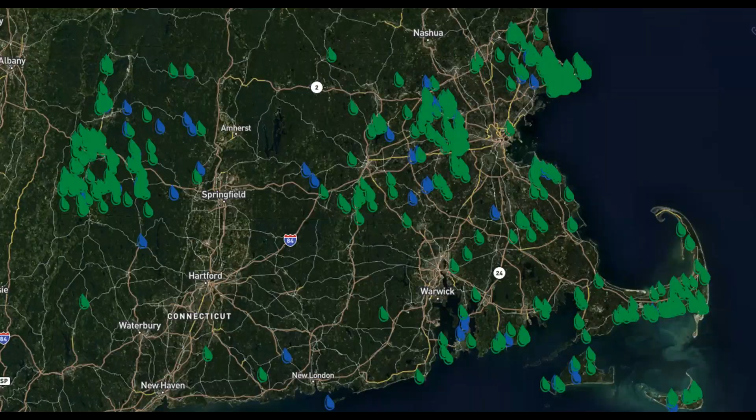Some of the droplets are so close together that there could be 10 or 11 systems in a small geographical area, which we've seen before. If you click on one of these droplets, it'll bring you to a new screen, and it'll actually give you a satellite image of that site. And then on the left-hand side, it'll provide you background information on that particular project, when it was built, the effluent strength, how many gallons per day, the actual location, and some site pictures and perhaps some videos.

This is a great tool if you're a designer and you just kind of want to get a sense of what type of use Perc-Rite has been in your area, or maybe you have a client who wants to get a better feel for that. This is not a brand new system and it's widely used throughout the state. This is a really good resource for you to share with your colleagues, your clients, or whatnot.

So the history of Perc-Rite goes back really to the 1970s, where effluent disposal was used through irrigation tubing, and it was generally in the Middle East. So they would pipe from the cities the treated effluent out to the deserts and grow crops. In the 1980s, the folks from American manufacturing learned about this and brought the concept back to the States and worked on how that system could work for us, and mostly on-site versions of that concept.

They got their patent in the 1990s, and their first system was installed very early in that decade. And the interesting anecdote is that our first original system is still active, and they actually went back, probably about 10 years ago, and they did a little bit of an archaeological dig and took a look at it, and the parent material, the tubing, everything was fantastic. So you're looking at something that's been in the ground for 30 years and still working exceptionally well.

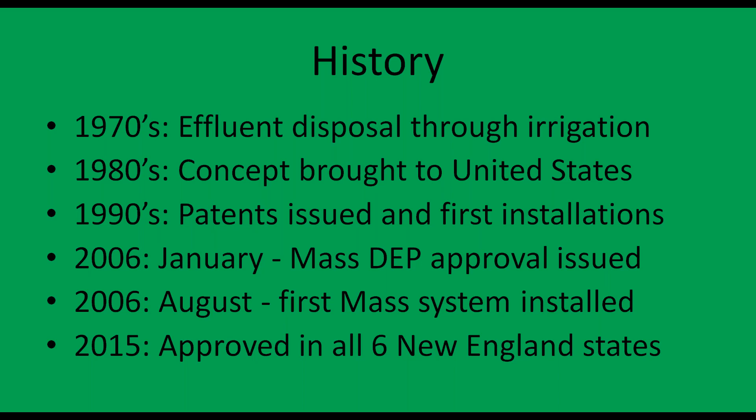So here is a little bit of the background of how Perc-Rite came to New England. It's really all about Dan. Dan worked as an engineer at Mass DEP for a while, and then went to the city of Gloucester, and they were having a lot of on-site issues for pollutants along the coastline, and he pioneered a lot of different technologies coming into the region. He learned of Perc-Rite and basically went to the private sector and brought Perc-Rite to Massachusetts and then throughout New England.

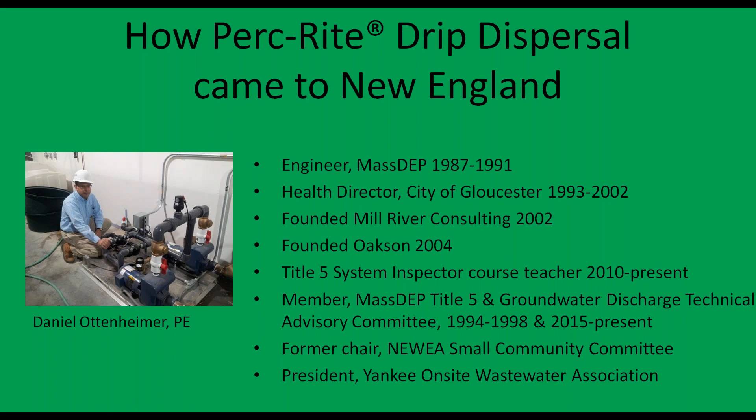So let's go right into the nuts and bolts here. So Perc-Rite is equivalent to pressure distribution under Title 5. So that's a very important thing just to get over with right away. We are considered pressure distribution. We are also approved to discharge both primary or treated effluent for new construction or upgrades and repairs. So we have a general use approval, we have a remedial use approval, and both approvals allow primary or secondary treated effluent disposal.

So here's a little flow chart of how the system works. We will have effluent generated into either a septic or treatment tank. It'll carry over to a pump chamber, pump through a device called the hydraulic unit. From the hydraulic unit, there'll be a force main that'll take the effluent to a manifold, which feeds the drip dispersal tubing. The drip dispersal tubing does not have to be in a perfect rectangular shape or perfectly spaced. You can see here in the rendering, it goes around a tree. It cuts short of another tree.

It goes through all the tubing, and it basically goes into a return manifold, back to a return force main into the hydraulic unit again, and then it has the ability to discharge back into the septic or treatment tank. That gravity discharge line back to the primary tank will allow us to not only clean the tubing when it's needed, but also clean the filters that clean the effluent before it goes out to the drip field. And we'll go over that in a little more detail throughout the presentation.

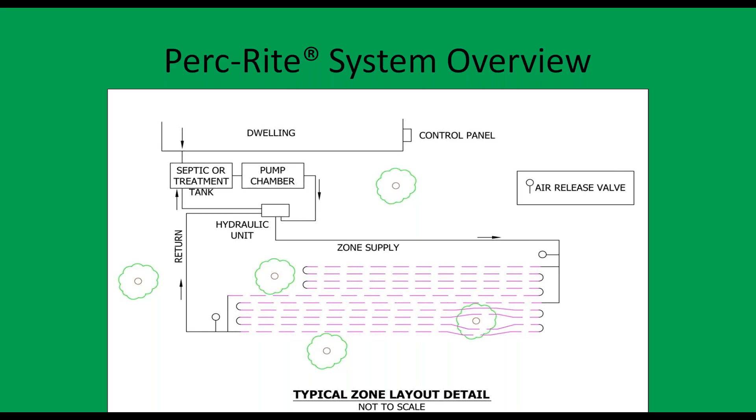So what we call a single piece of drip dispersal tubing is a run. A collection of runs make a lateral. So this would be fed through a manifold. So one lateral is a series of runs put together. Many series of runs or laterals tied together we'll call a single drip dispersal zone. Typically, residential applications will only have one zone.

We'll have our septic tank or treatment tank, carry through to a pump chamber, pump through the hydraulic unit. We'll have the supply and return force mains and manifolds and that gravity return line that goes back to the primary tank. There's a control panel that controls the whole operation. There's an air release valve that allows instant pressurization and also the ability to purge the lines after the pumping. And that is a Perc-Rite drip dispersal system.

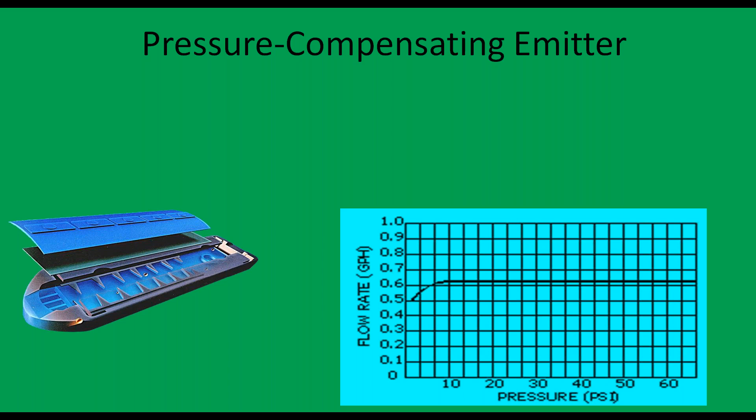And what's critical for this is that the system does not need to be installed on a flat bed. This can be on a sloping site. It could also have irregular shapes. So perhaps you have a situation where you have tubing that is closer to the pump, lower elevation than far away from the pump. You're going to get the same exact application rate.

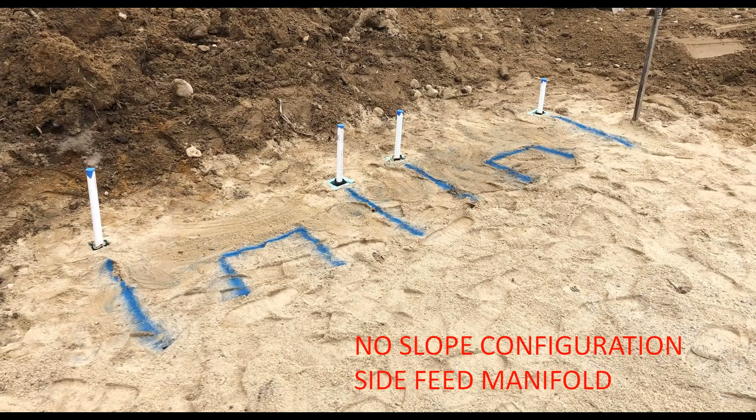So in order to achieve that pressure inside the tubing, there is a manifold configuration. So when there is no slope to a particular drip dispersal zone, it'll be what we call a side feed manifold. And that's very similar to your pressure distribution type configuration, where you have force main below the frost zone, and then it goes up to the pipe. So you can see here the different laterals that are ready to be connected to the drip dispersal tubing. So again, it's a side feed manifold, no slope.

Let's talk about the approvals. So Mass DEP issued our first approval in 2006. We have both a general and remedial use approval. And we are fully approved under Title 5 for new construction or upgrades, septic tank effluent or treated effluent, secondary or better. So pretty much any type of system that you need to build under Title 5, Perc-Rite can be an option for you.

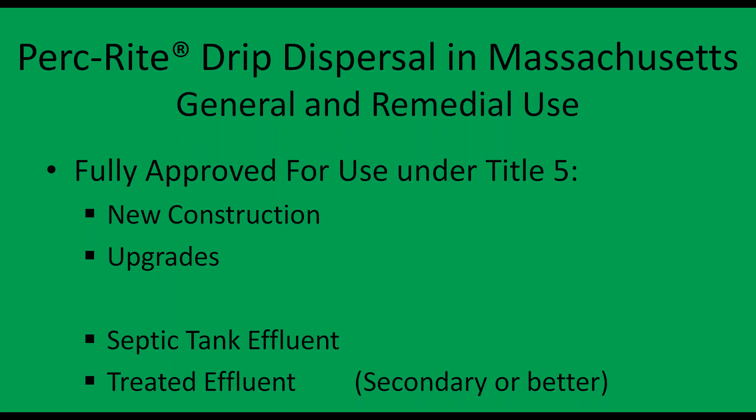Some of the key aspects of our approval through general use and/or remedial use: we are considered pre-engineered under 2,000 gallons per day. We are equivalent to pressure distribution. There is no 5-foot overdig required, and this is not a variance or anything. This is written right into our approval, so you don't need to ask for any relief. It's granted. There is no need for an inspection port.

There are no vents required. We can be as close as 5 feet to a cellar wall. The tubing can be installed in the parent material A, B, or C soils. The tubing can be as shallow as 6 inches below finished grade. So that comes into a huge play when we're dealing with mounded systems. Perc-Rite will end up being the shallowest type of option that you can choose. And there are some flexible reserve area requirements that are given to us under the approval.

There are some instances where we have to issue some letters for any system greater than 2,000 gallons per day. Oakson will provide you a letter of review that you will turn in with your submittal. Perc-Rite can be installed in Class 4 soils. If you choose to design in a Class 4 soil, you will need an accompanying letter by Oakson again. And for any type of non-residential systems, commercial, restaurant use or whatnot, we will also issue a letter of review of your plans.

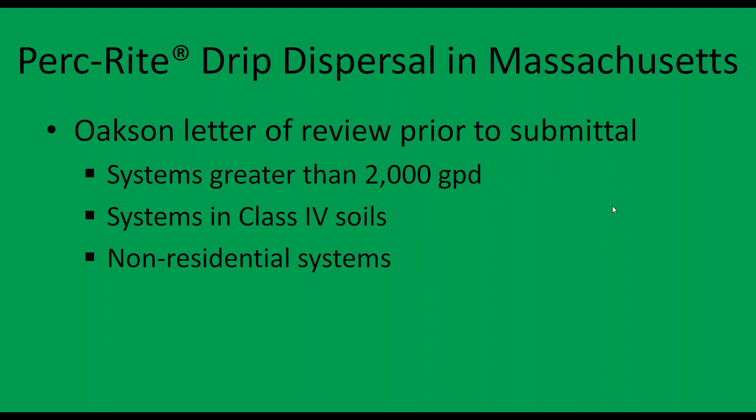So sizing, really simple. We are the same size as any Title V leach field. So if you're just doing a traditional Class 1 type of soil, you can use the same loading rate under Title 5. Because we are equivalent to pressure distribution, we can use the pressure distribution loading rate chart. And the same goes for any type of local upgrade approvals. You certainly can choose to do that with our technology. And if you're using a treatment system, you can gain the relief that the treatment system approval gives you and use it with Perc-Rite.

We have a good question here. The question is, why is it acceptable to install this system in the A soil horizon? Dan, we haven't heard from you in a while. Would you like to chime in on that one? I would. Can you hear me? Yes. Oh, great.

So we want to get as much natural treatment as we possibly can, and the A soil horizon contains the most organic material and the most microbial activity, and allows for the best treatment of the effluent when it's applied into the soil. So that's a primary factor. Also, just a simple matter of construction. If you're building it in the woods or in someone's yard, we're trying to minimize site disturbance. So putting it right into the A soil horizon is a great way to reduce the impact on the land during construction.

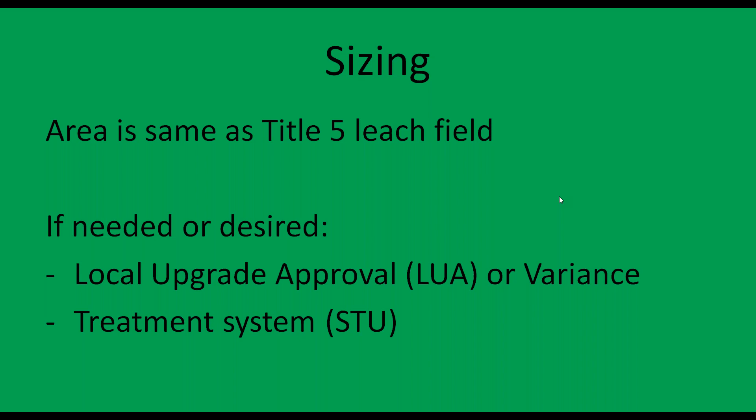So we are included in the guidance manual for groundwater discharge projects. So if you are a designer working in that area, there is great information there, and Perc-Rite is a very viable option. The rendering that we show a lot on the right is actually a real project. So I wanted to take a satellite image and share it with you so you can see how the grass is quite thicker over the dispersal area, because this picture was taken in late November. So most of the other grass on the site is dormant, but the warm effluent with the uptake into the grass roots is keeping it quite more alive throughout the season.

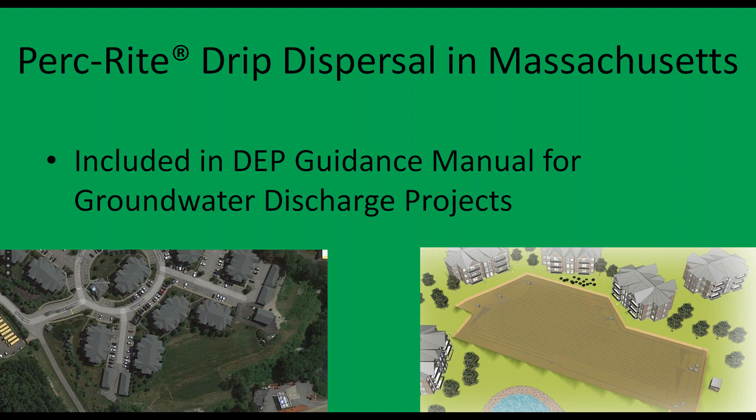So our approach, Oakson provides full support from the design concept, installation, all the way through operation. So let's talk about some of those specifics. Let's go through a residential design. So if you are a designer, you could go and grab the design manual that we have on our website. It's also included here as a handout in your dashboard if you'd like to download it.

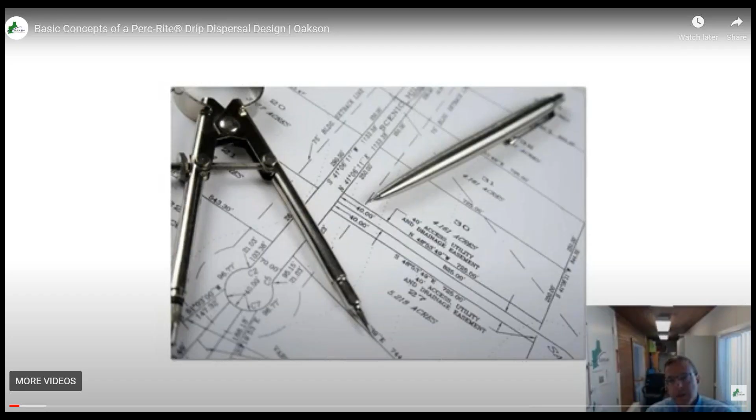Or in today's world, we've seen a lot more use of video and YouTube videos for demonstration. We have a great video on our website that Dan hosted that walks you through an entire Perc-Rite Drip Dispersal design. So we encourage you to do that as well. And along that, on our website are all the resources you will need to be successful with a Perc-Rite design. So all of the approvals, installation guides, the AutoCAD details that you'll need to pull together your plan, and more video tutorials on how to do it.

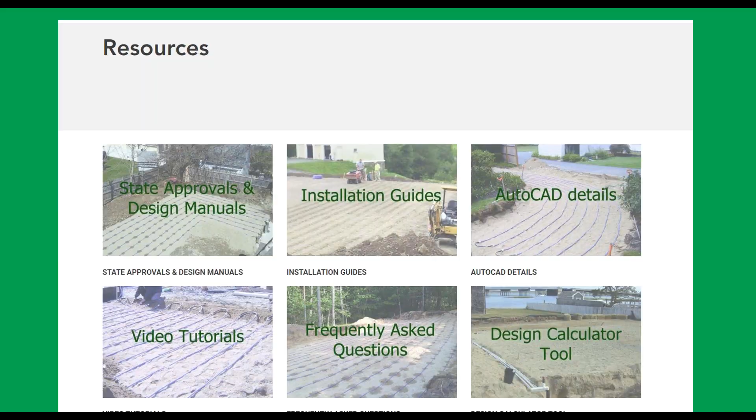Now, we're trying to keep this presentation to around 2 hours. It would be impossible to give you an overview of Perc-Rite and all the different nuances it brings and have a very, very in-depth design portion of it. So we'll touch upon it. And if you want to get into more detail, all those resources are available, or you can also just reach out to Dan or I.

And then we can look at it and give you a very defined Perc-Rite layout that would not only meet all of the requirements for your site, but also be laid out in such a way for the most efficient method of installation and future operation and maintenance visits. So when we interact with you, we're keeping in mind, sure, we can squeeze it on a plan, but in reality, how's it going to work in the field, and how is an installer going to be able to build this efficiently? So when you provide us the information in this context, it'll allow us to draw on our experience and give you a design that will work well from design all the way through installation.

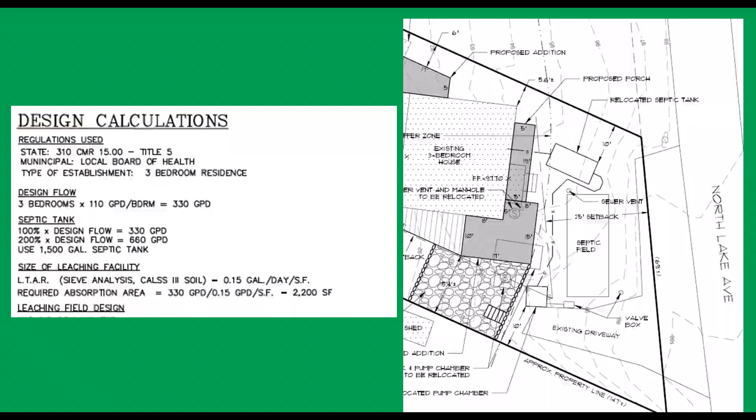So let's look at a real specific design. A designer sent us a plan, and you can see it's a 3-bedroom. The soils aren't great. They decided to use a treatment system, and the nature of the site was they had to work around a lot of different obstacles: the house, some wetlands, some unsuitable test pits. So they ended up with a serpentine-shaped field, which is fine. If you were to take the equivalent area of that field, it would meet the area required under the Title V

design calculation requirements. So the designer gave us that shape. We worked with them to put the tubing in there and build the manifold. And we have a very successful project due to that. This particular project is in Aquinnah on Martha's Vineyard. We have a very detailed video on this project on our website if you care to learn more about that.

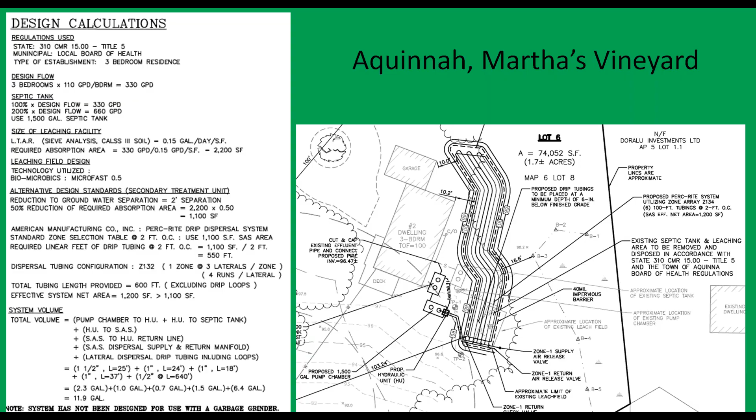As part of our AutoCAD details, we provide what we'll call the page 2, or note section and schematic part of the details, where we'll give you notes to help the contractor during construction, demonstrate how the manifold will lay out, show you what the equipment will look like, have a system profile, all the things that will assist the contractor in understanding what it's going to take to build the Perc-Rite system. So all these are available to you on our website.

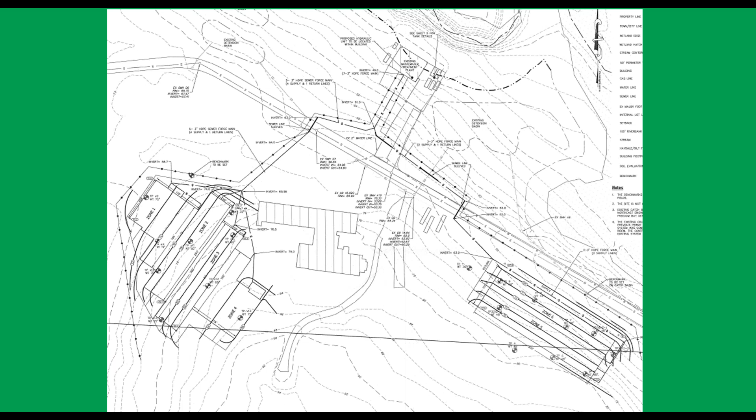So a large flow design is very similar, except that we're going off of the groundwater discharge guidance document. There are groundwater mounding calculations that need to take place, much larger zones, and the details are not cookie cutter. So we don't display the large flow details on our website because they are quite unique. So you can see these manifolds and zone layouts are not something that you'll be able to pull off of the chart on our website.

But nonetheless, we are providing very customized details, and also, most importantly, all of the math for the friction loss calculations to determine what pump size we came up with, what size force mains will be used to achieve that pressure inside the drip tubing.

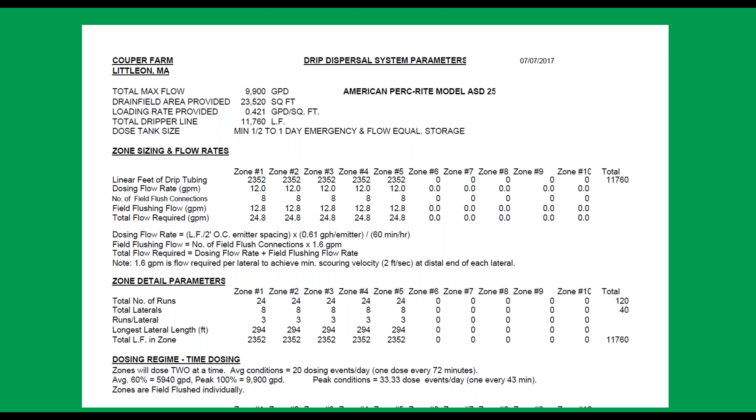We could have a zone that's a half a mile away. We could have a zone that is 100 feet of elevation change, quite common for these large projects. But Oakson will provide you all of the calculations that are required for our design, and then you can go through and make sure you're happy with those. So that is what we're going to focus on for design at the moment.

And there are a couple other questions that came up, and that might be a good time to answer. So one of the questions was, can this be installed under a parking lot? Great question. So our approval states that it cannot be installed typically under a parking lot. And the reason being is that it will work, it will drip, it'll function, but because a parking lot will choke off that oxygen transfer, there is a potential for maybe long-term soil clogging because of that.

We have done some pilot testing with venting the drip tubing under parking that has been quite successful. So currently we did not petition for a change to our approval because we still want to say that it is not approved under parking. But if you have specific areas that you'd like to entertain it under parking, we've had some success with that, and it would just need to be a variance.

So great question. Another question is, what different types of installation methods do we prefer. I'm going to push that forward because we're going to get into all different great types of installation. And then another question was about tree roots near a field. Do they wrap around the tubing? Any potential plugging?

So what is Oakson's role in the installation? I think it's important that we define some roles here. We are involved before the installation, working with the contractor to go over planning. We're going to walk them through the actual project prior to construction, talk about some key points, help them compile the proper list of parts so that the day of installation we're not all running around.

We will provide electrical schematics for the system. So if the electrician has some questions, we will help them answer all those prior to the day of installation. We have a library of video demonstrations. So if you're a contractor who really wants to learn about something beforehand, we have all of the information you will need to be an expert prior to the day of installation.

We provide, as a company, a technician for all of our installations, whether it be an Oakson employee directly or a third-party trained individual that we hire to help the contractor. For every project, there will be an extension of Oakson there to assist the contractor. Now, we are not your primary source of labor, okay? We are not going to be there while you guys take off and expect us to hop in your excavator and trench or whatnot.

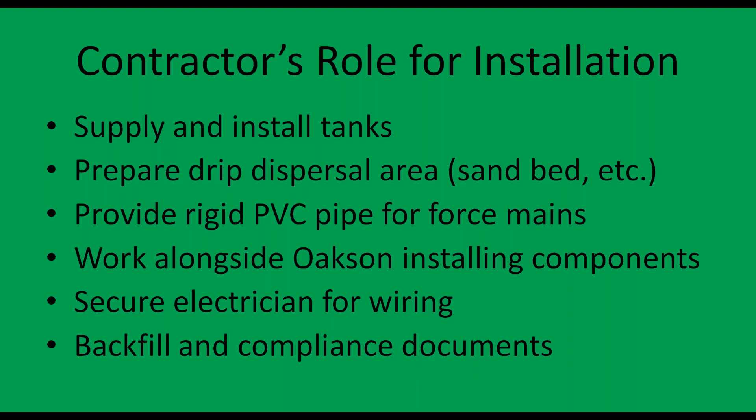And then finally, it'll be your job to do the backfill and the compliance documents. So the certificate of compliance, you'll need to do your end on that. And sometimes we will ask you to help us interact with the homeowner to make sure that the operation and maintenance document is signed prior to the installation. We may not even have contact information for some of the homeowners, but since you're hired by them, we'll ask you to help us get the O&M contract executed.

So let's go through some drip dispersal tubing installation. But before we do that, let me just peruse some of the questions. Great follow-up question. Let me tackle this now. If the ground is frozen, how does the water drain through the soil? Excellent question. They're all excellent questions, by the way.

So if you were to look at frozen soil under a microscope, the molecular structure is actually wider and more porous than unfrozen soil. So when you're forcing a drop of water at about 48 degrees at pressure into frozen soil, that soil structure will receive it and thaw it out just around the emitter.

Okay, so essentially, the drip dispersal field itself will be unfrozen because of the activity that constantly goes on. So that's why you'll notice the grass especially continues to grow much later in the season, and even throughout the winter in some of the milder climates like Cape Cod. So that's how that works.

Another question was, what happens if the house is abandoned for a few years and the roots grew inside the tubes? That won't happen because the tubes are empty, so there's not going to be any water there, and there's not going to be a need for the roots to grow inside the tubing. We have close to 1,000 systems installed, and in all honesty, we've never had a case of clogged tubing because of roots. With 1,000 systems under our belt, that's the case.

So moving on, drip dispersal installation in a sand bed. A little bit to talk about here, but not too much. Here is a great example of a sloping sand bed that's an irregular shape. We'll have the contractor stake out the field with all jogs, and then we're going to go in and paint some lines along the contour. That allows us to go back and just pull the tubing, cut it, stake it in place, and have the proper spacing.

So for a sand bed installation, it's quite simple. If this were a more regular shaped bed, we may just choose to say, let's cut 12 lines at 50 feet long off to the side, drag them into the sand bed and stake them down. But for a sand bed installation, it's quite straightforward, like you see here.

Some more interesting examples of drip tubing installation. It can be plowed into existing soil conditions. One of the first things we talked about was the ability to use the A and B soils. That applies here for existing lawns, okay? Obviously we need to have proper groundwater separation, right? And so that's achieved here.

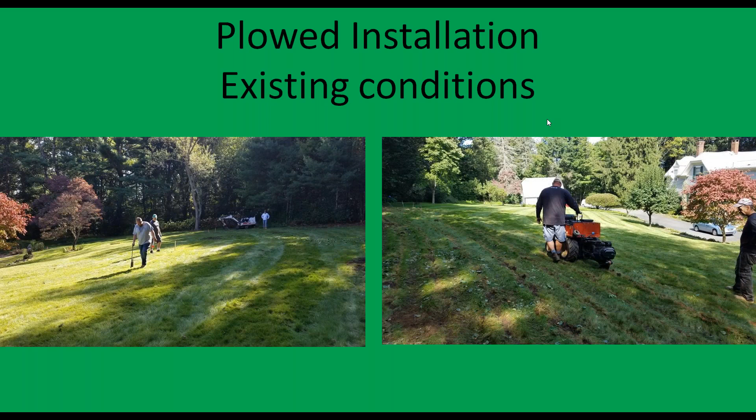So plowed installations are a great way to not only preserve the site conditions, but also save time and money, because there's no need to import expensive fill material and strip out perfect loam and grass. So it's a very unique but efficient way of installing a disposal system.

Sometimes, and this is more applicable for large scale installations, we're plowing the tubing into a sand bed, and you might ask, why would you do that? Why would you just plow it into sand? Why wouldn't you just lay it on the surface? And the answer is really backfill. If you think about the reach of a machine, you only can kind of reach out so far with the extension of the boom and the bucket.

So when we're dealing with large flow projects, we have typically beds that are 150 or more feet long and could be 300 feet wide. So if you think about drip tubing staked down on such a large area, it would be very difficult to actually trek over the tubing. So, probably about 6 or 7 years ago, we came up with a concept that has worked quite well.

So the engineer would specify what the tubing elevation would be. Let's call it elevation 100. So that's where your sand bed would be for the tubing. But then the contractor would install an extra 6 inches of that same select sand, Title V or C33 sand, on top. So now we have an envelope of sand that the machine can drive over and install at a

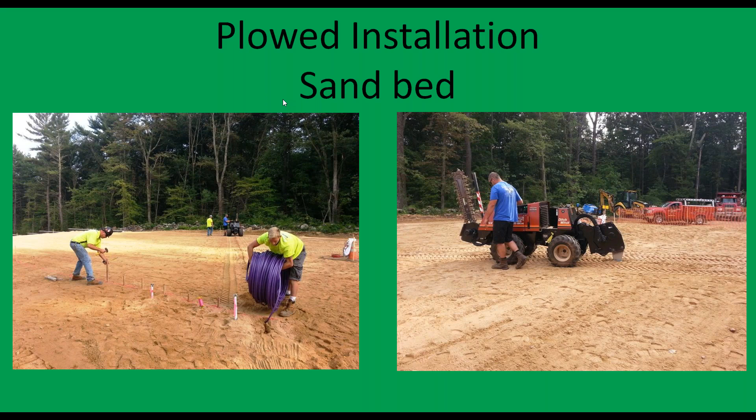So let's talk about some trenching installation options. So sometimes the vibratory plow is not the best choice, and that could be a wooded installation or an area where there are a lot of tree roots or whatnot. So you can use a chain trencher to make a little trench, and you can put the tubing in that trench and then rake the material back over.

Another good question I wanted to throw in here: can an irrigation system go on top of a Perc-Rite system? So the answer is yes or no. What we've seen is the best way to do it is that you can run perimeter heads around the system and throw onto your grass, but we don't want to ever install an irrigation system over a Perc-Rite system, and that's mostly because of damage.

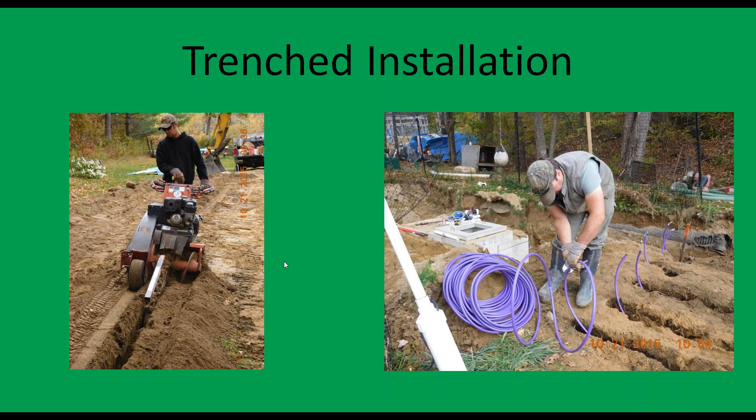So this would be the most extreme example of a trenched installation. We had a client who loved their wooded site to the point where there was no sapling, nor rock, nor semi-mature to mature tree that could be disturbed. As you can imagine, they had deep pockets, and they decided to have the contractor hand dig trenches throughout their entire dispersal area. What was very unique about this installation was that you can see in the pictures that all the leaf litter was blown off of the area that the drip dispersal tubing was to be installed.

So this was a mid to late fall installation. So the contractor blew all the leaves to the side. They did their hand trenching. They installed the tubing, raked it back over, made their manifold connections, tested the system, and then blew the leaves right back on. So basically, if we were to take you to the site and bring you into the area and say, tell us where the disposal field is on this site, you would never know. It's just so beautiful and unique.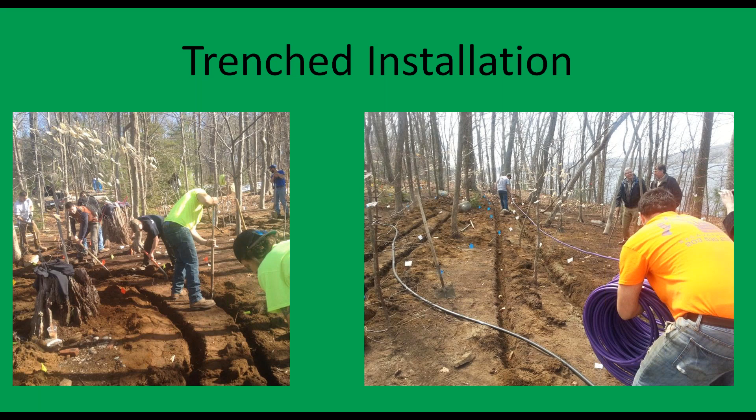And again, no further than 2 feet to count for effective leaching area, but it can be wider if we're avoiding obstacles and we have more area available to us. Okay.

Now, at this point, we're going to not take a break and run away from your monitor, but I'm going to show a couple of videos. And it's important at this point because video is such a huge resource for all of us to learn. And we were forced through the COVID pandemic to grow our resources to help teach. So Geoflow has invested a lot in video over the last year and a half to still interact with those who need the teaching tools to learn about this technology.

So the first video is going to be vibratory plows pulling tubing into different types of terrain. There is no sound for that video, so I will be your narrator. I will be Morgan Freeman, for that matter.

The second video, we're only going to show you the first couple minutes of it. It is one of the complete installations that we show on our website. So we want to introduce you to that to show you how in-depth these videos can be. This video is about 15 minutes long, and we don't expect everybody to have the time to invest 15 minutes in that. We're certainly not going to do that during this presentation. But a minute or two of it would be a great introduction so that if you do have time to invest later on, you can do that at your convenience.

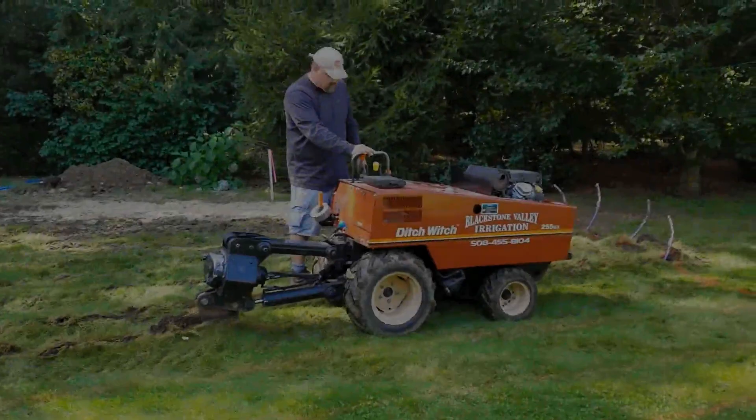So this is an example that you saw in some of the pictures. We're seeing the Ditch Witch going through the grass, and it's reaching the end of the line. And this is where they're going to pull up, cut the piece of tubing off and transition. Now you can see the little burrow left by the machine, and that easily goes down with a hand tamp or just driving back over it with the tire.

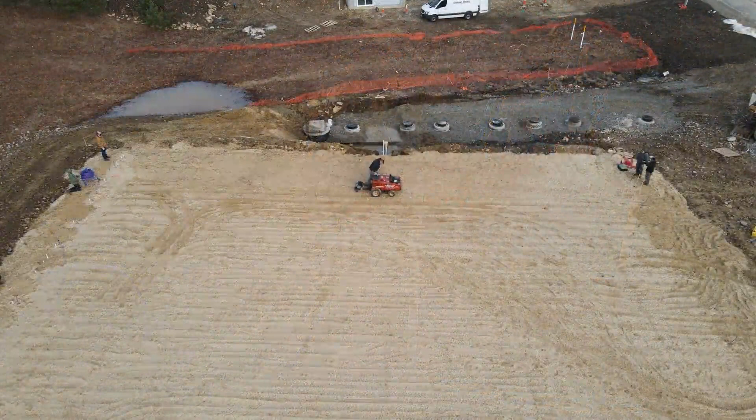Here is a different type of Ditch Witch pulling through. The video is going to speed up, so now we're going at like 4 times speed just so we're not here all day. And you can faintly see a string line attached to a stake at the end of the sand trench. That's so that the operator can drive the machine in a straight path to ensure that the spacing for the tubing is maintained. Those blocks affixed to the machine are keeping the tubing at the proper depth for every pull. So you can see the earlier remnants of those lines.

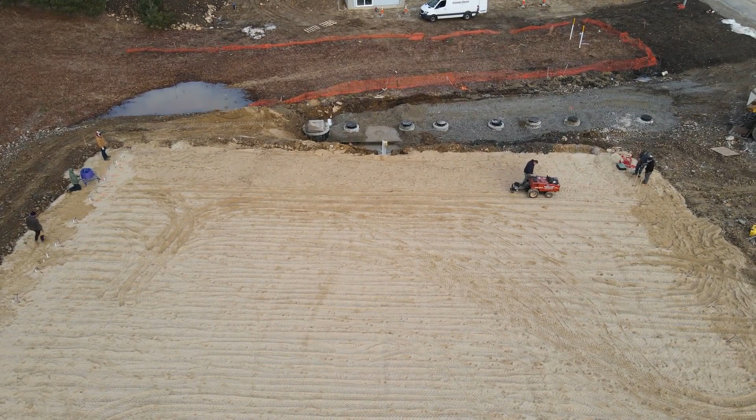This video is taken by the newest addition to the Geoflow team, which is the Geoflow drone. So we're flying over the field. This is a Title V system that's 7,000 gallons per day. It was installed in late December. And the field is about 120 feet long. So each run of tubing takes between 3 and 4 minutes to pull in. This is running at about 4 times speed, just so we can get through watching a little portion of it.

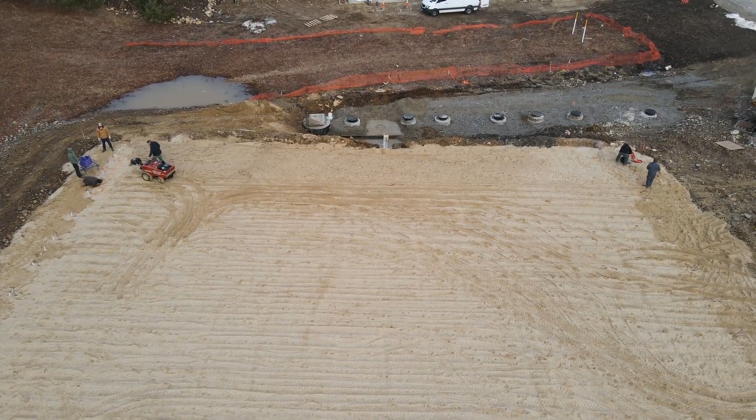So the driver finished his pull. Now he's driving back to the area where the tubing is on a spindle. They'll reattach, drop it to the depth, and then continue on. So we pulled in enough dispersal tubing for about 7,000 gallons per day in a little over 5 hours.

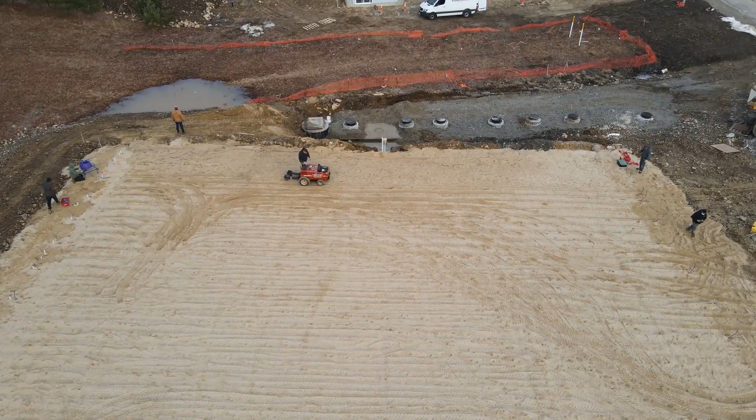The only assistance you really need to make it go as quickly as possible is somebody at each end that moves the stake and the string line while the operator is driving back. So you don't need a lot of skilled labor. Actually, this irrigation contractor can be hired as a sub of Geoflow to pull the tubing in for you.

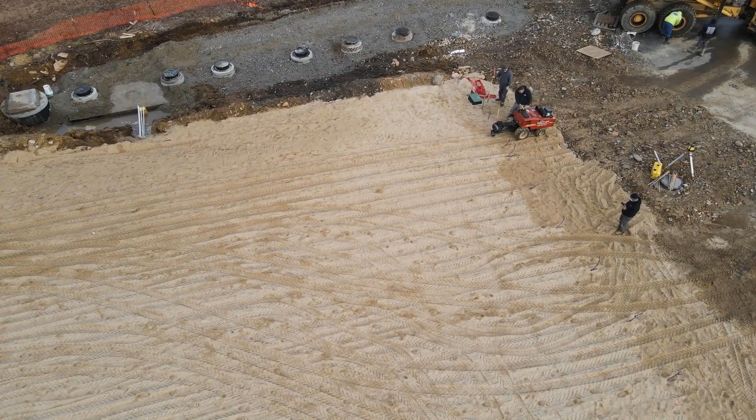So we're getting near the end here, so we're slowed back down. So we actually witnessed a couple of pulls here in this limited video. So now I'm gonna take you to the video with the audio portion of it. So stand by.

Okay, so the next thing we're going to talk about is sustainability. I like to use the term sustainability rather than just call it O&M, because we feel as though the product has a great track record of working for a long time, not only in Massachusetts, but we've learned about this through our American manufacturing with the systems way back in 1990. So again, active systems for over 30 years.

We have very durable types of components. So in our systems, the pump is a very high quality, high head pump. The hydraulic unit is built with great components, the control panel as well. All of the actual mechanical aspects of it are superb. One thing, though, that makes Perc-Rite very sustainable is that time dosing aspect. The tubing isn't demand dosed.

So there's a timer that goes off. We'll talk about that a little bit more shortly, where the system will run for 10 minutes, rest for a few hours, run again for 10 minutes. For larger systems, when there are multiple zones, it'll start with the first zone and then go to the second zone and move on from there.

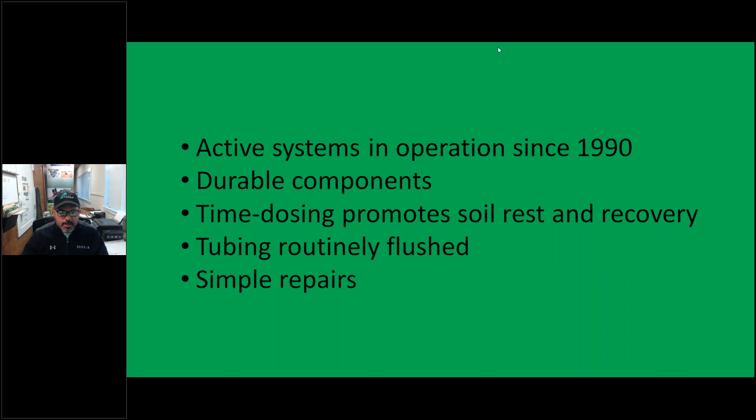So the resting of the soil promotes that oxygen transfer and allows the soil to not clog over time, as traditional disposal systems are designed to do. So Perc-Rite is not designed to grow biomat and work its way out of the laterals. It's intended to remain active and porous for, well, I can say at least 30 years, but the clock is still running.

What allows us to maintain that tubing is that it is routinely flushed. When we went through the flow profile of the system, we talked about that return line. So not only are we pumping out to the system, but we're also creating a mechanism for the tubing to clean itself with the effluent. So there's a valve on the hydraulic unit that's typically closed that will open up about once a week and flush the tubing at scouring velocity.

You can imagine septic tank effluent in a 1/2-inch diameter pipe could promote slime growth. Of course it could, but in this case, we're dealing with it mechanically and flushing the tubing. There are other drip dispersal tubing options out there, different than the Netafim product that we provide, that use a bactericide to deal with slime growth. Perc-Rite has chosen to use a more mechanical way to do that because that bactericide can wear off over time and lose its effectiveness. So we're dealing with a mechanical aspect all along.

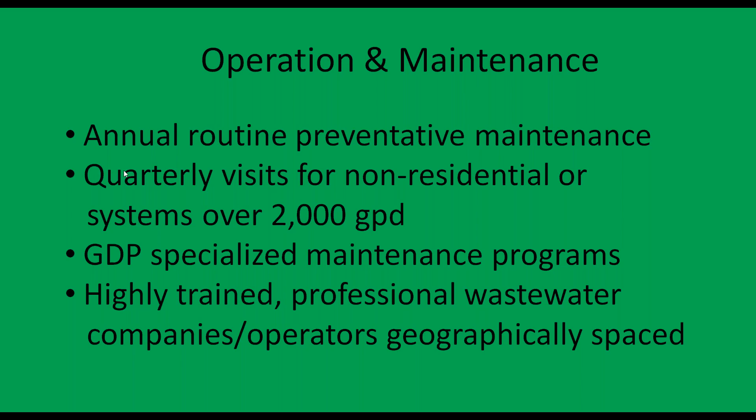And just parlaying that point, Geoflow doesn't do the maintenance. We are a company that works up front with the designers, installers, and maintenance providers, but we have decided to partner with highly trained professionals in the business to handle all the maintenance. So we have sort of an arm's length view at that. So we're trusting the professionals out there to do the job. We're giving them all the tools and resources they need to do their job well, but they still report back to us. So we are still very much involved with all the reports and save them and help them on an as needed basis. So that's how Geoflow is involved with operation and maintenance.

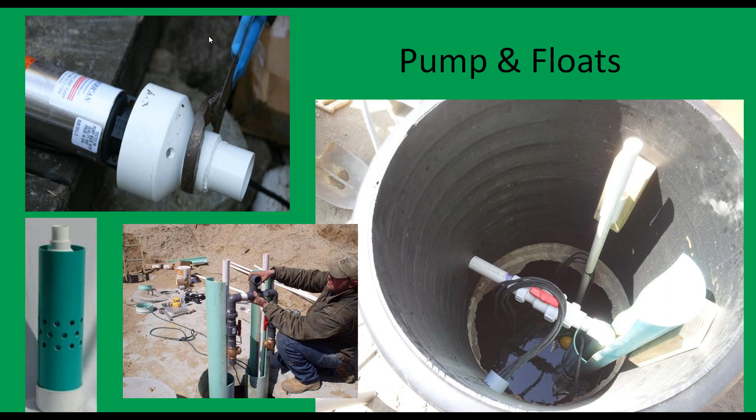So, we've talked about some of the components. Let me just formally introduce you to them a little bit. So we supply a pump. It's a high head effluent pump that works very well over a wide array of lift and distance. So a very small pump does a very big job for us. It's typically half horsepower on 99% of the residential projects. Along with the pump, we provide a pump mounting mechanism called a cool guide, which allows for protection against any solid carryover that could happen in a system that may have fallen through the maintenance cracks. We provide sump of up to 16 inches, and there's also a built-in way for water to be drawn over the motor of the pump to cool it during operation to have it last 10 plus years.

So we build a drip system with 400 linear feet, we start it up. All we've got to do is look at the flow meter and time it for a minute, and we know that we're running properly. So even for systems that are trenched or plowed in below finished grade, and you're not seeing the beauty of that wetting front, we can time it on the flow meter and precisely verify that it's operating at its designed flow rate.

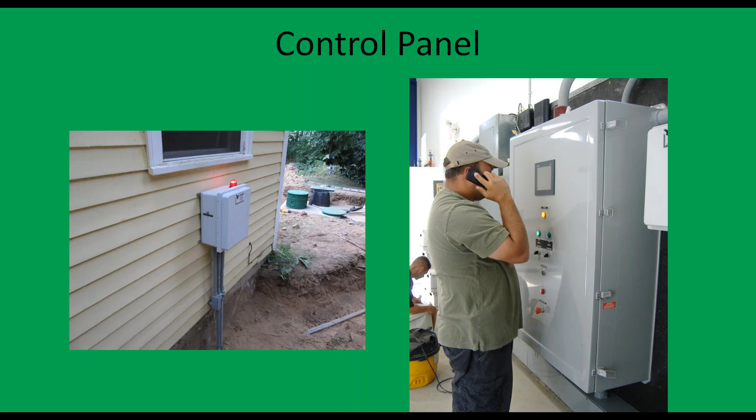All right, so earlier in the presentation, I talked about how there are many instances where designers have chosen to use Perc-Rite because they didn't have other options on a site. So I want to share some of those reasons with you on how a Perc-Rite project could be implemented into a potential design for you.

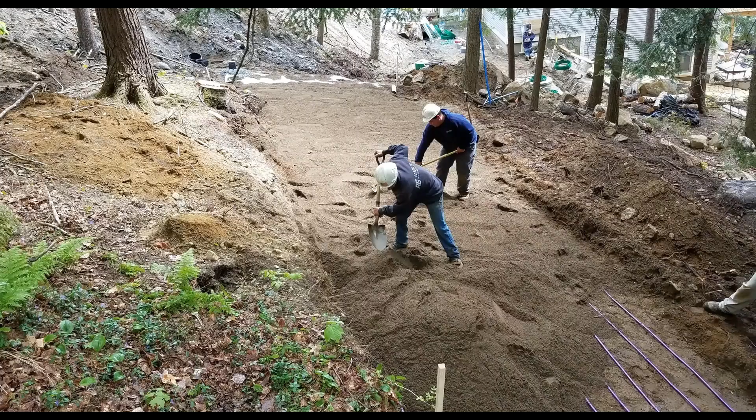So working with slopes. When you're dealing with slopes, we don't have to build a flat site, right? We can follow the natural contour. It essentially allows you to stay as low profile as possible. And if you've ever designed pressure distribution for a sloping system, it's a nightmare.

But with Perc-Rite, because we can work on that range of pressure between 7 and 70 pounds, you don't have to worry about designing different orifice sizes or spacing, or having a ball valve on this lateral and cranking it closed on that lateral. So basically the tubing accounts for all of the engineering you need to work with a slope. And you can see here a great cross section on how the tubing just goes above the existing grade for a raised system and minimizes the amount of fill needed for this particular site.

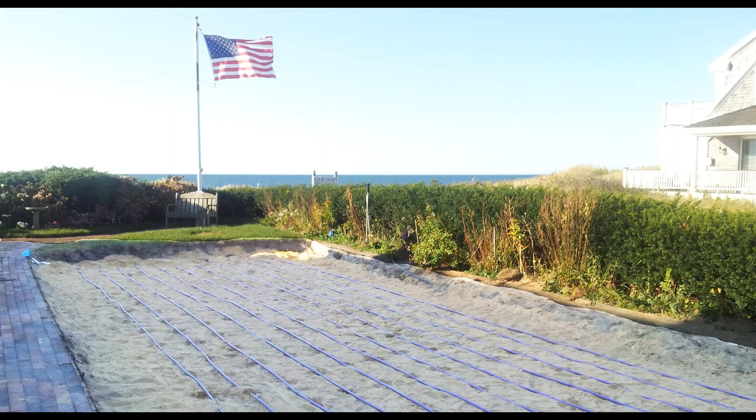So low profile, how 6 inches of cover material can help you with projects, both new and repair. This is a repair on Cape Cod, and the existing patio was next to a failed system. Because of the nature of the site, any other system would have been above the patio, and the folks would have had to walk up a 2-foot mound in their backyard, which overlooked the ocean. So it wasn't something that the homeowner would have been happy with.

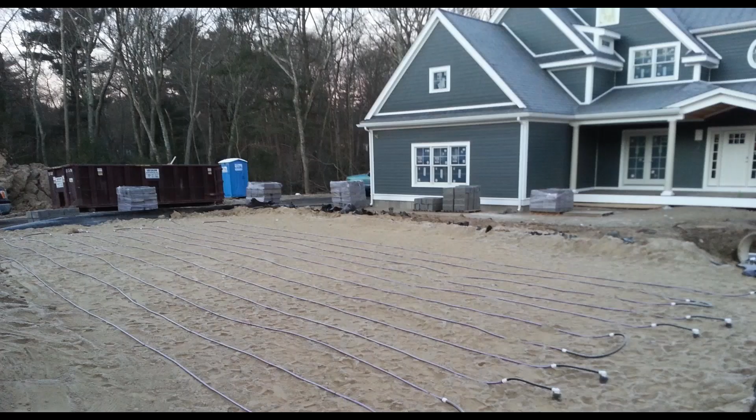So a Perc-Rite system was built in place of the failed system here, and the finished grade is going to be precisely the same as what the lawn was below the failed system. This is a new construction where you can imagine any other system here would have been a couple of feet in the front lawn, so you would have walked out your front door and seen a big mound in your beautiful new construction.

This is a really interesting thing. We had a very unique engineer about 8 years ago, before a lot of computers could do this for us, who showed his client a rendering of what a different technology would be and what their profile would look like. Well, this is a lakefront property, and they would have to climb over a mound to get to their sailboat on their lake. So the homeowner said, no way, get me something else.

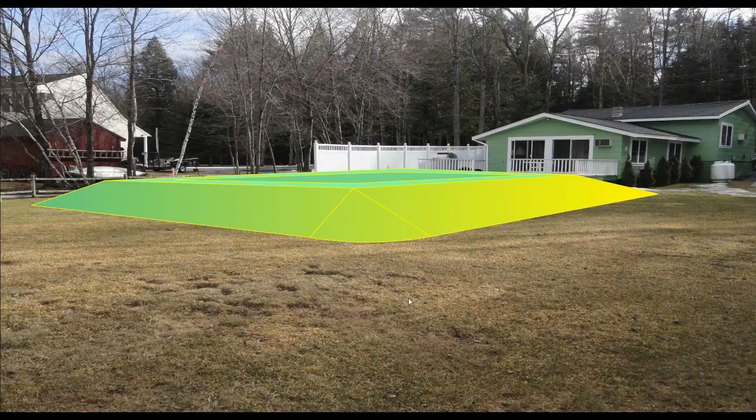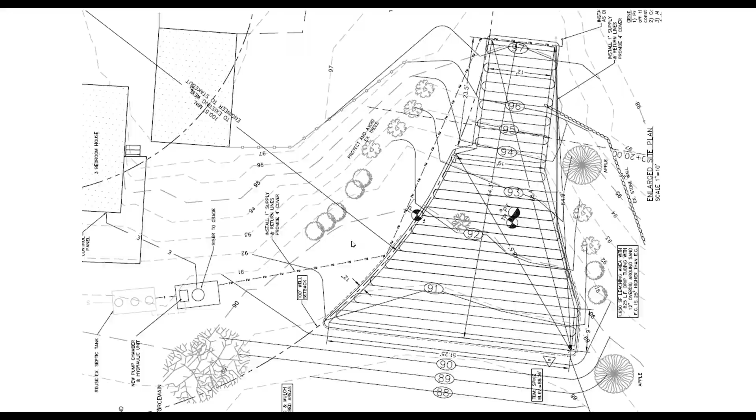Oh, I'm going to pause here. A couple of questions just came through. Great questions. Is a deed notice required before a certificate of compliance is issued? Yes, we do require a deed notice, and as part of the compliance documents, it is on the onus of the design engineer and the contractor to be in compliance. We have all of those documents available as a template. We took the actual deed notice and put all of our models in there to make it very simple for compliance. So yes, that is required.

Do the filters ever need to be replaced? The answer is no. They are automatically backflushed through those valves, and they are quite durable. They're compressed disc filters, so they are quite durable and last for the life of the system. And the filters, more questions.

Okay, so the hydraulic unit, as you saw in the pictures, is sitting on top of a tank that provides some warmth for the unit. There's also a heater strip that goes in the unit that's wired to the control panel that keeps it warm throughout the winter months if a company were to go away, if a homeowner were to go away, the heater strip would help keep everything warm.

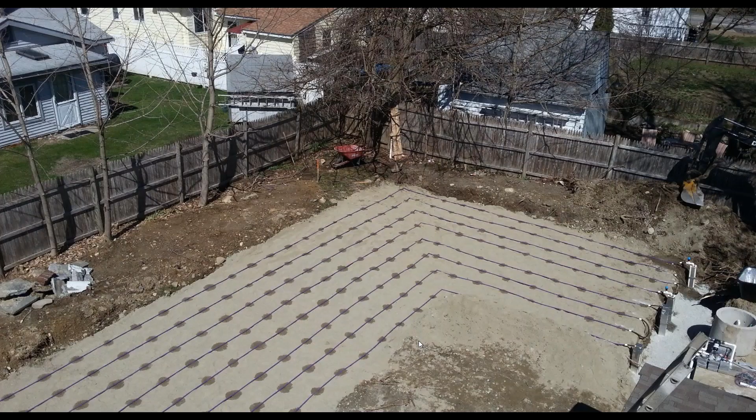Here's another unique example of a project. So the only way to get the requisite amount of area in this backyard was to have a right angle following the property line offset. So this, we've seen this quite often, and it works very well. So very unique shapes.

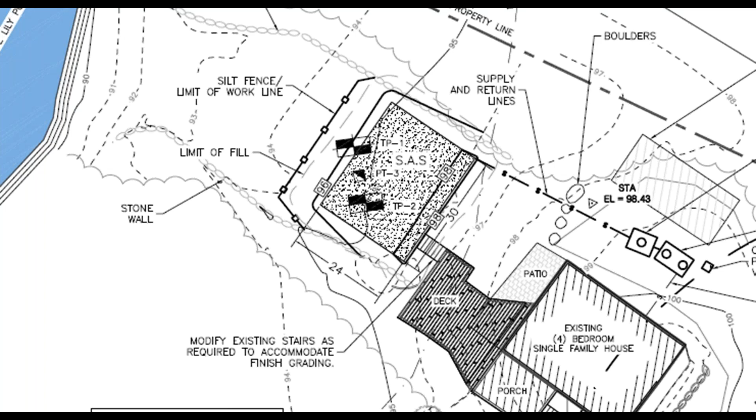So lack of overdig. Here's another example where you have a drip dispersal field right next to a body of water, so you have to maintain your setback, but also there's a beautiful deck that overlooks that body of water. So if we had a 5-foot overdig here, they would have to rebuild the deck. So that maintained the use of the property very nicely.

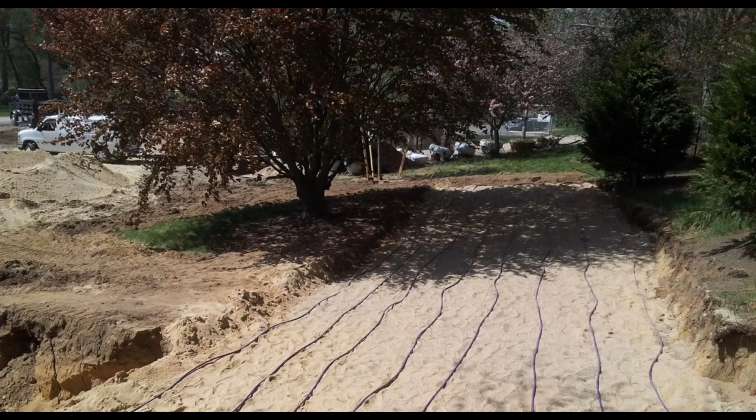Here, the 5-foot overdig would have forced the homeowner to remove a gorgeous specimen tree. So we maintain the vegetation because of that aspect of our approval.

The only way they could avoid a tight tank was to do this, and I can report to this day that this system has been on the ground for 11 years and still working wonderfully. It was quite a unique example and something that we've shared a lot, but continue to do so because it could be one of our most unique examples.

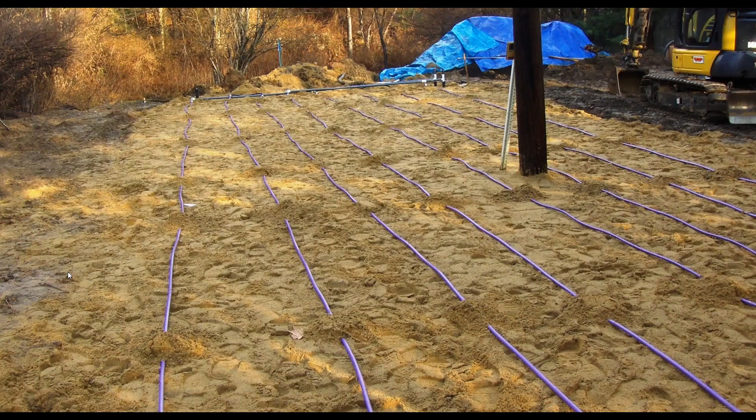Sometimes there's the need to have utility poles in people's yards, so you don't need to call National Grid to move the utility pole. We can just work around it. And Dan, without saying names, do you want to share perhaps the uniqueness of the homeowner of this property? Well, this is the house of a former commissioner of DEP who researched all of the disposal solutions and instructed his engineer to use Perc-Rite Drip Dispersal. There you go.

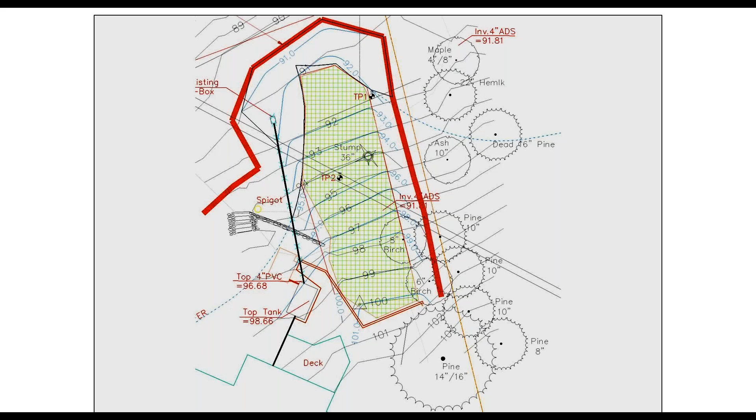So here's another unique example of just an odd shape with a lot of slope, a lot of trees, and it's just not something that would really be conducive to other disposal options unless you wanted to build that proverbial kitty litter box in your side yard. So here it is, all different lengths of tubing following different shapes and whatnot.

This was a great example of a Metro West homeowner who spent an awful lot of money on a beautiful home from the 1800s, and they just enjoyed the meadow nature of the property, and they said, no way do I want to get rid of the trees or clear the natural vegetation. There's got to be another solution. So in this case, they opted for Perc-Rite, and this is a system I think was built in 2006 or 2007. So it was one of the really early examples of Perc-Rite in Massachusetts.

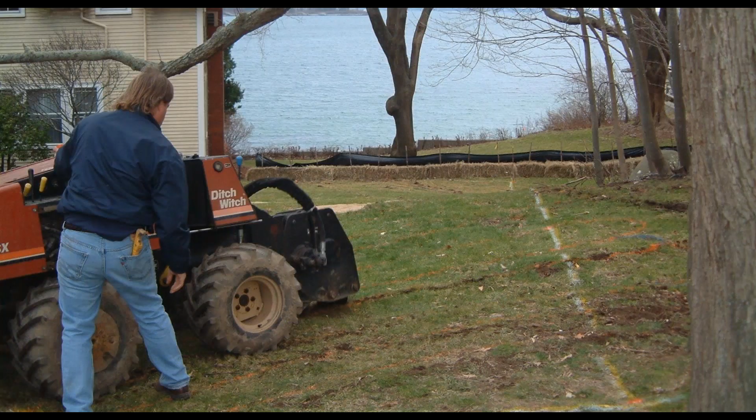So here you have a beautiful waterfront property. Imagine a big mound right along the view. So instead of that, use a vibratory plow, pull it into existing grade, and have a wonderful result.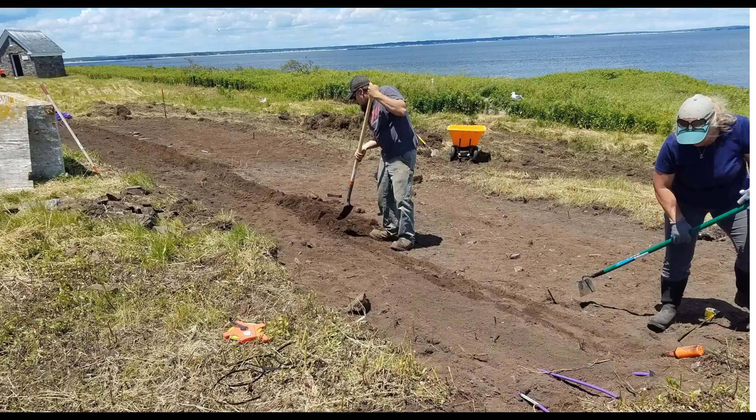In this one, this is an island installation. It's actually up in Maine, but we thought it was a good example. There was no way to get equipment over there, so they had to hand dig everything. So when you have unique island examples, and we have quite a few islands, not as many in Massachusetts, unless you're dealing with the big islands, Nantucket and Martha's Vineyard.

But off the coast of Maine, there are quite a bunch of islands that have residents on them, and then also Winnipesaukee and other lake islands in Maine or New Hampshire, where we tend to see a lot of these installations where you can't really get equipment over there. So you've got to do it by hand, and Perc-Rite is quite a viable option.

Preventing hydraulic failure. So Perc-Rite only discharges the design flow. Want a little bit more talking here and less slides, but we are a time-dosed system. So we can control the amount of flow that goes to the Perc-Rite system over the course of the day based on how many minutes we're going to program the pump to run.

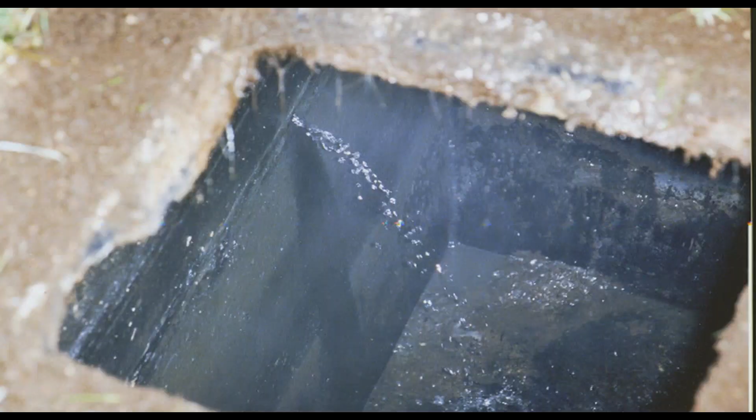So if you have a 3-bedroom house design, we are going to program the panel to run enough minutes over 24 hours to only discharge 330 gallons per day. Now, this is a great thing to prevent against hydraulic failure, but it's also a very bad thing if you've installed the tank with a bad seam, or if it's a collection system that hasn't been properly sealed, or you have a leaky toilet.

So what does that mean? That means that you're getting extraneous and unintended water into the waste stream, whether it be through infiltration of rain or groundwater or snow melt, or internal plumbing that's not doing its job. So if you have a leaky toilet, there is a very good chance that if you install a Perc-Rite Drip Dispersal system, you may get an alarm during the first week of your operation.

And I'm getting amens here on my internal chat box from some of the operators that are on the session. So is that a good thing or a bad thing? Well, personally, we at Oakson think that's a good thing, because one of the main causes of system failure out in the Title V inspector world is hydraulic failure. And because Perc-Rite has mechanisms built in to mitigate those things, we consider it a good thing.

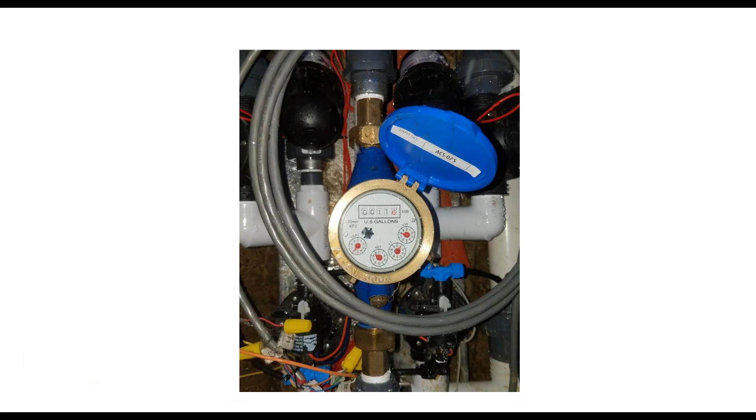And it really is the flow meter, right? We talked about the flow meter that allows us to track the amount of flow, both from a gallon per minute perspective, but also from a totalizing perspective. So the operators, every annual visit, can calculate the total flow on an average daily basis between the visits.

We've had instances where we've had a retired couple who have been averaging 320 gallons per day on a 3-bedroom system, but every Thanksgiving or Christmas Eve, their alarm goes off when their kids come. Well, guess what? We found that they had a guest bathroom in a part of the house they don't use anymore, with a leaky toilet. Because their water usage was so infrequent, that leaky toilet was masked because it didn't quite tip the alarm. But whenever they had guests come on the holidays, it would go off.

Well, a very astute operation and maintenance person said, geez, it doesn't seem quite right. You're averaging less than your daily design flow, but you're 2 retired people, you're out a lot, you vacation, whatnot. That's not right. Maybe you want to have your plumber do an ink test in some of your toilets. And lo and behold, that's what they found.

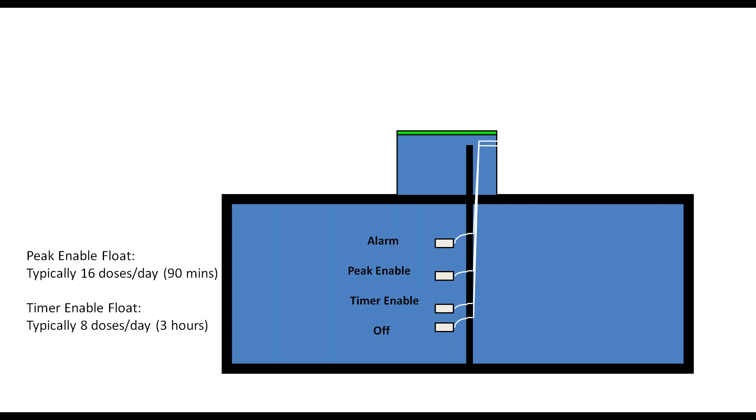So it really allows the soil for recovery, but also because of spreading out the doses, when you have a leaky fixture infiltration, that water can fly through all those float settings and cause the alarm to go off on a perfectly functioning system. But yet again, the operation and maintenance provider will help determine what the cause of that alarm is, and then we'll figure out if it's a leaky riser or a leaky toilet or whatnot.

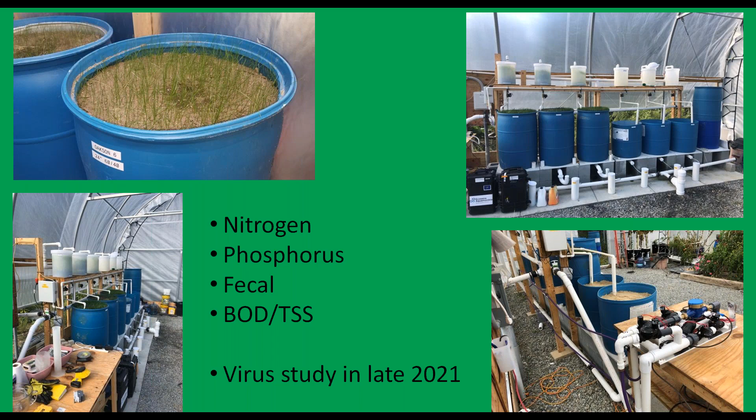So we're going to go on to closing now. I want to show you a couple of featured projects. One of them is in Western Massachusetts. It was a groundwater discharge permit project. They were looking for 25,000 gallons per day.

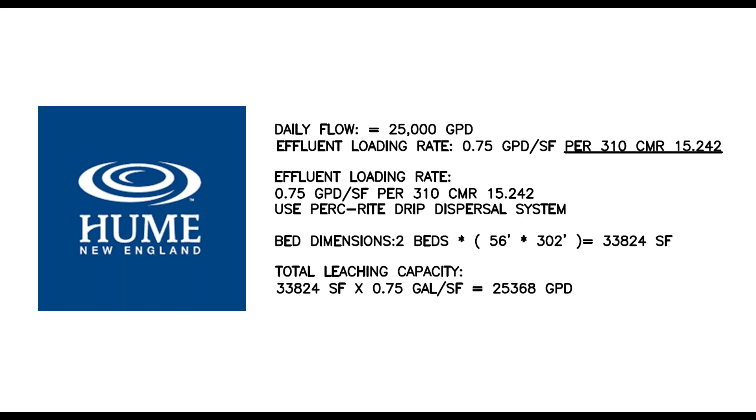They had very poor soils, but because of the loading rates that we have under the groundwater discharge permit program, Perc-Rite could be loaded at 0.75 gallon per day per square foot, and any other technology, including trenches or whatnot, had to be loaded at 0.2 gallons per day per square foot. So the project only needed 33,500 square feet of disposal area, whereas anything else needed 125,000 square feet of area. So it was quite the thing for the site.

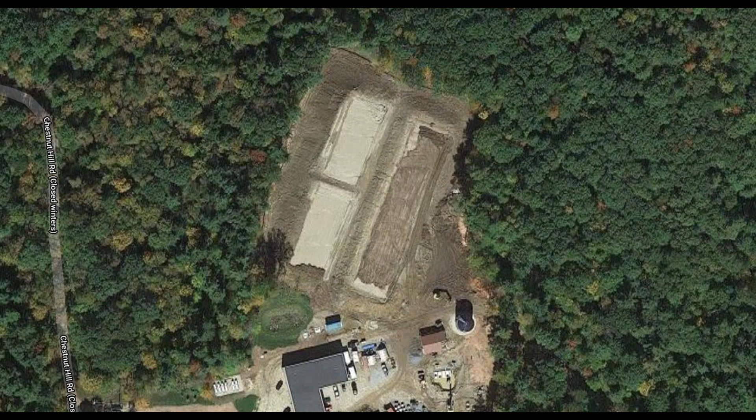And because it was a wooded site, it mitigated the need to do a lot of clear cutting. And the reason why we had to clear cut is not because working around the trees wasn't an option, but because the adjusted groundwater mound required the system to be out of the ground no matter what, but it definitely mitigated the need to clear a lot more of the forest. And because this is a campground, it was very important for the project to maintain that campy feel.

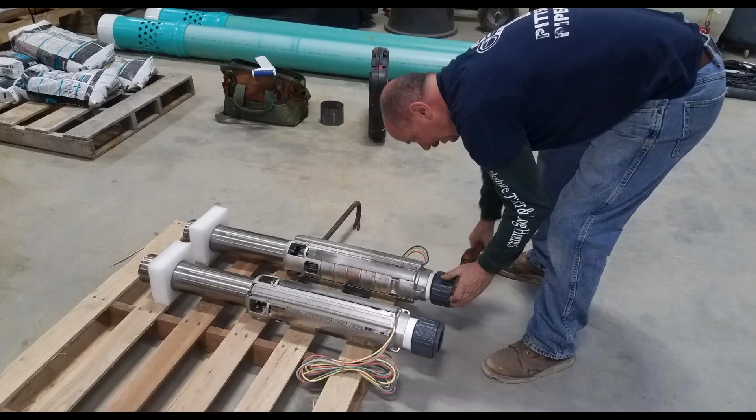So quite a nice project. So our special thanks to the great folks out in Western Massachusetts who are involved in the design, build, and operation of this project.

So lastly, I mentioned in one of my earlier slides that the very first project that Oakson was involved with was in 2006 in, I think, Weston. But I got a strange phone call in the beginning of the pandemic from a homeowner saying, yeah, I need a little help with my project. And they gave me the address in Charlestown, Rhode Island. And I said, geez, I don't think you have a Perc-Rite system. And they said, oh, yes, we do. I'm like, no, you don't, because I've been involved with every single system.

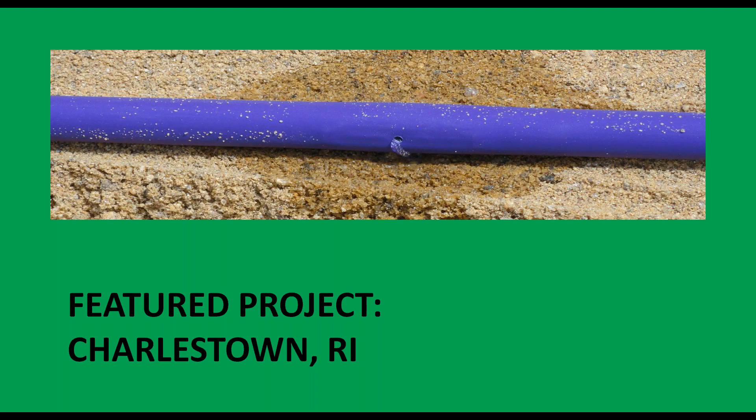And he said, well, I have some documents that I found that I can share with you, and I'm pretty sure it's a Perc-Rite. So Charlestown, Rhode Island is kind of close to the Connecticut border on the Long Island Sound, and it's somewhat close to the University of Rhode Island, and they have a center for a demonstration site for technologies. So we learned that back in 1998, the University of Rhode Island, and I think it was George Loomis more specifically, worked with American Manufacturing to procure a Perc-Rite system to use at a house that they could have as part of their demonstrations.

So the homeowner took some pictures of these plans and sent them to me. And lo and behold, I'm looking at hand-drawn pictures of a Perc-Rite Drip Dispersal system designed in 1998 with the assistance of American Manufacturing. Well, I kind of was dumbfounded. It's like, wow, yes, it was before Oakson, but I am extremely interested in this because this has been in the ground for over 20 years. It seems like it hasn't been on the radar, so it hasn't been maintained. It's been used, but now the guy's getting an alarm. So, I got to check this out.

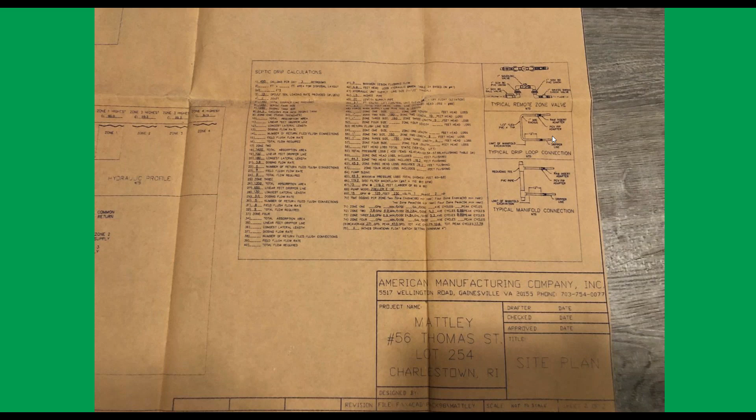So I went down there and had a mask on, and the owner was in the house, and I looked inside the hydraulic unit, and what happened was critters started nesting in the hydraulic unit, and they ate through a couple of wires and a couple of hydraulic lines, causing the system to not get out to the zones. And because of that, there was some spraying of effluent inside the hydraulic unit, and it caused one of the solenoids to fail. And so the system wasn't working.

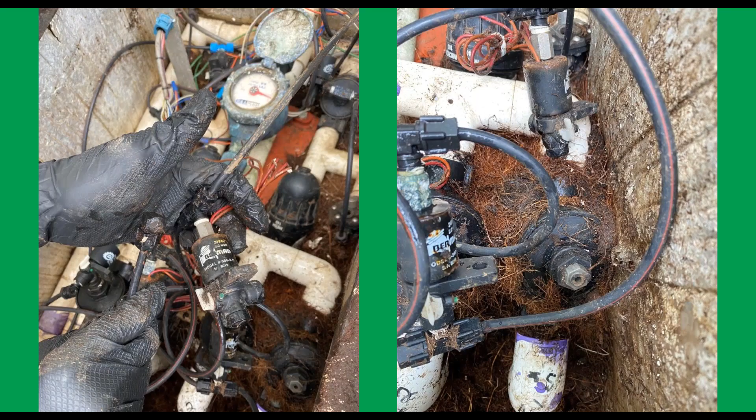Now, our common practice, and you'll see this on our details, is we call for stone to be put around the base of the hydraulic unit in the box, because critters can't really burrow through good compacted 3/4 stone, so it preserves that aspect of it. But nonetheless, here we are. So I went out there and I was able to replace a couple of solenoids and remove some of the nesting, and we had a 22-year-old Perc-Rite system that was for the most part neglected and unknown to anybody other than the person. It changed hands like 3 times, and the URI center didn't use it anymore. It kind of fell off their radar as well.

So I guess the moral of the story is the homeowner went on our website, and I think we have 3 reviews, so not too many, but the homeowner went on there and said, hey, I have a system since 1998, and I can tell you that the Perc-Rite system works. And we're proud to say that the components are very durable. And although we do promote and mandate operation and maintenance, as we all know in this industry, sometimes things fall through the cracks, whether it be homeowner transition or transition through local boards of health. But the good news is that the Perc-Rite system is designed for sustainability, and here is a great example.

So any questions before we conclude?